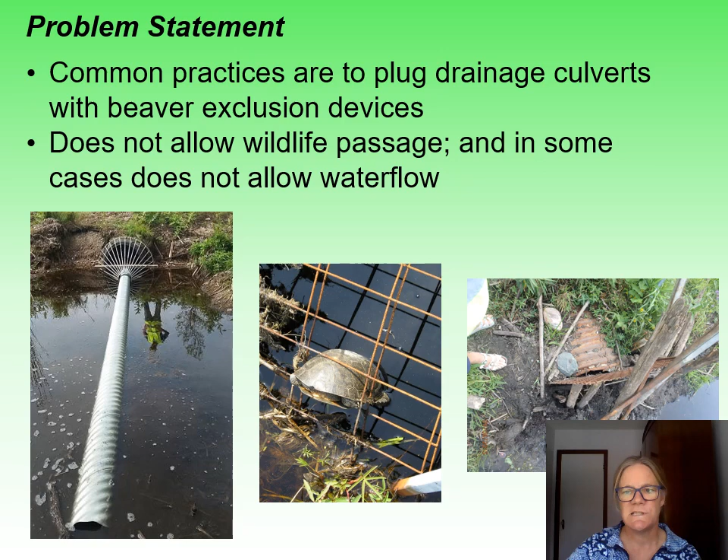So the objectives of this project were to have drainage culverts in beaver and turtle habitat to be able to pass water and wildlife under the road. And also we need to prevent beavers from damming these culverts so they can pass the water and the wildlife.

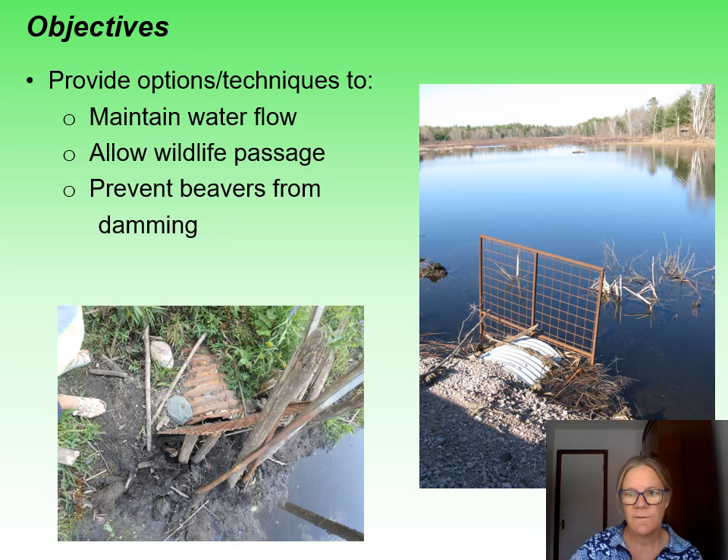So our target species in this project are freshwater turtles. We have 8 species in Ontario, and all of them are listed as species at risk on the Species at Risk Act at the federal level. Road mortality is a serious threat for all of these turtles, and often these turtles come up onto the road shoulders to nest, and they are more at risk of roadkill. In addition, they cross roads to get from wetland habitat on both sides of the road.

So our methods were to first begin with a literature review to evaluate whether there were exclusionary measures used for beavers at drainage culverts, as well as for wildlife passage, and to look over all of these methods that have been used in the past. And we came across experts and contacted them, such as Mike Callahan and Skip Lisle, and we compiled all this information. And we had a MES student from Queen's University do this work.

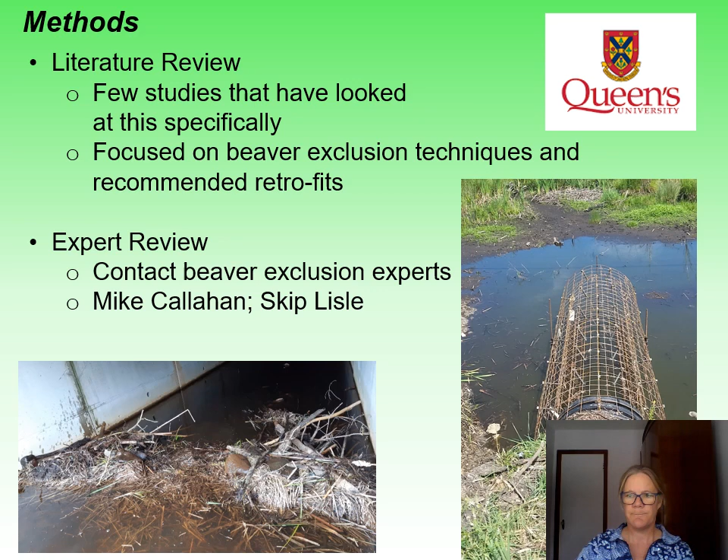So the journey began, and we found Facebook resource topics, and we also found resource books. Eager, for example, written by Ben Goldfarb, who is now writing and researching for a book on road ecology. So we compiled all of this information, and what we did was look and focus on beaver exclusion techniques that are used by experts and how these techniques can be modified for wildlife.

One example is in the top right. We have one-way doors. So in these exclusionary measures, fencing that is used around culvert faces to keep beavers out, we can put one-way doors to allow wildlife, when it comes through, to escape the exclusionary measures.

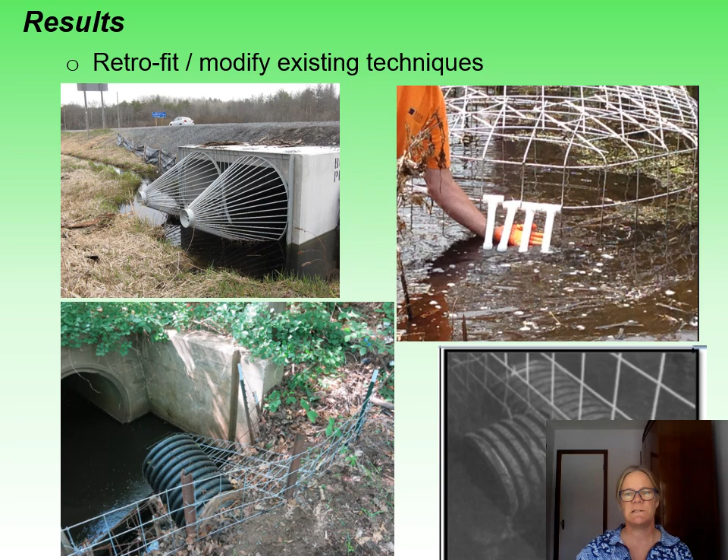Turtle doors. The turtle door concept is when you're putting the exclusionary measure around the culvert face to keep the beavers away, you include a gap, and this gap is upland, it's in higher water, so the beavers will not go around out of the water through the gap with their sticks to plug the culvert. And the idea is that turtles can still fit through this gap to use the drainage culverts.

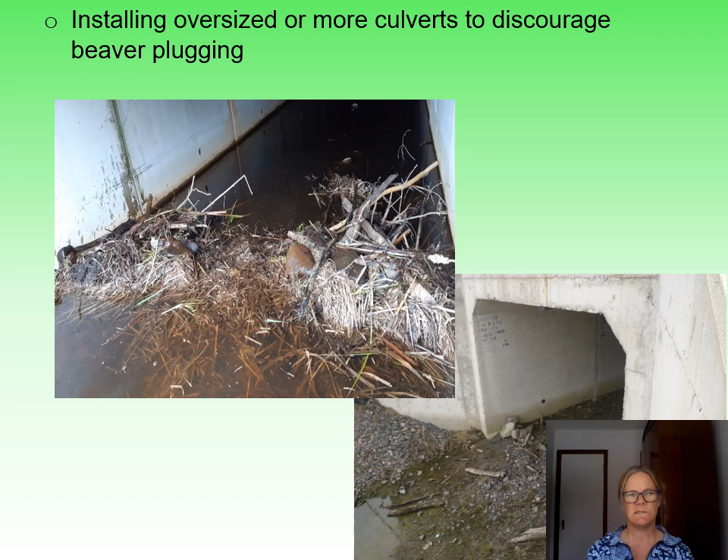Another concept is to be proactive and to have extra large drainage culverts rather than the smaller typical 800 millimeter culverts, which can pass more water. And also beavers will be less inclined to dam these larger structures because of the amount of debris and effort required.

So our study site was on Highway 7, located between Peterborough and Ottawa. And this area had a lot of freshwater turtles, a lot of wetlands. We had been monitoring it since 2012, and we found that this one location had reoccurring hotspots for the 5 years of monitoring, and quantitatively, the roadkill rates were quite high. So we focused on this spot, and this spot was ideal because it was about a 500-meter hotspot segment. And so we could include exclusionary fence along the wetland habitat on both sides.

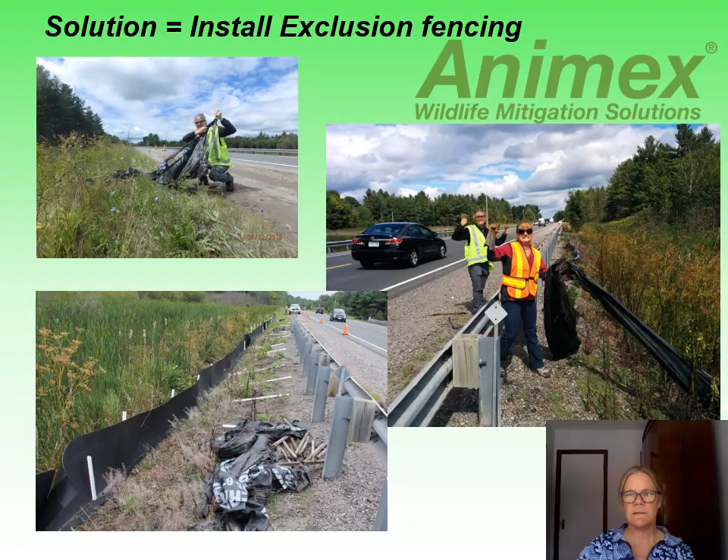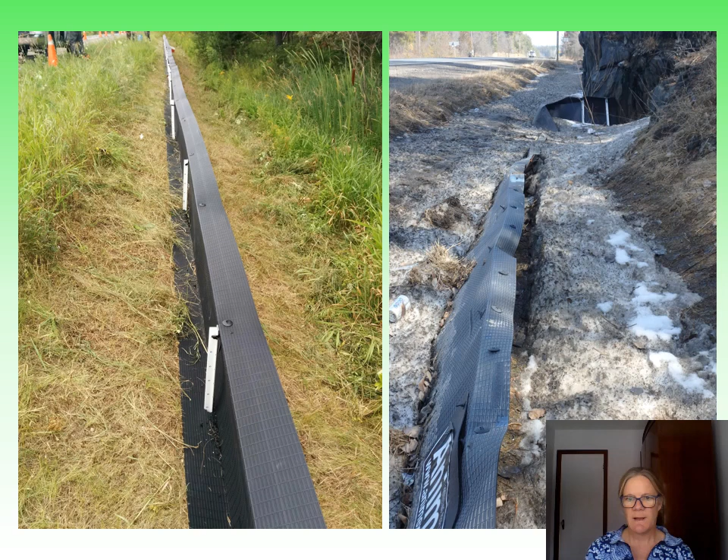So Animex fencing was installed, and this material was donated and very well fit our budget. So we went ahead and installed the exclusionary fence in 2013, and we monitored. Phase 1 entailed putting the fencing on top of the ground surface on the roadbed in the road shoulder, and we used PVC posts to hold it down. But this installation method did not withstand Canadian winters with our snow and ice. So we went and reinstalled this solid material into the roadbed, and we used larger PVC pipes, and we also trenched it in to protect it from the snow and ice.

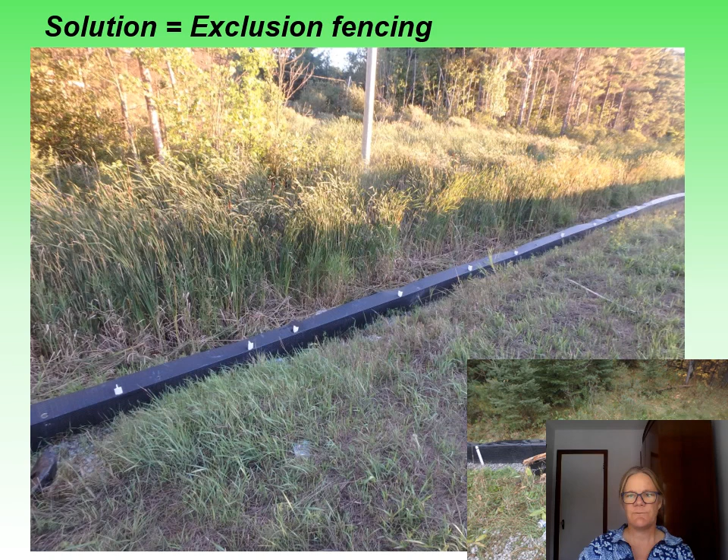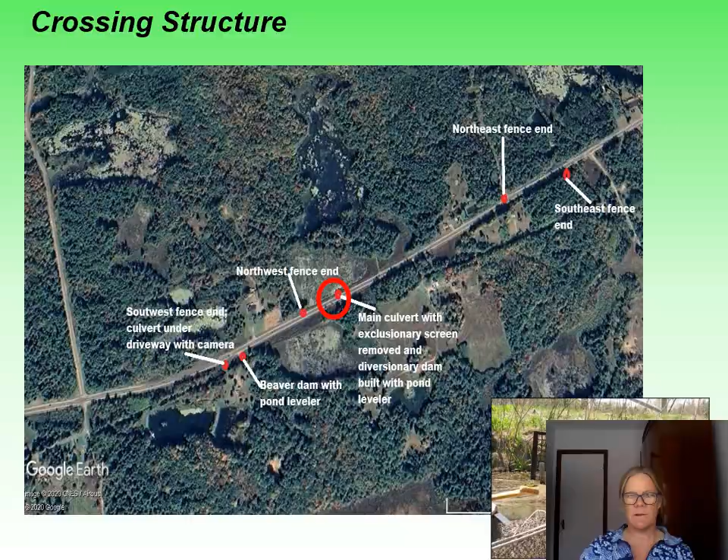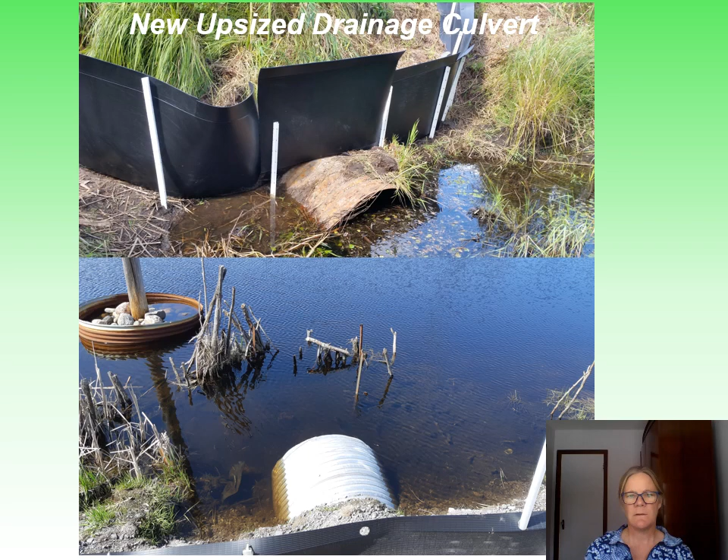So after we installed the exclusionary fence and we showed that it was able to work and reduce roadkill, we wanted to now get turtles past the highway in a safe way. So we went to work at the main drainage culvert, where that red circle is, right in the middle. Luckily, at the same time, the Ministry of Transportation replaced that drainage culvert from an 800 millimeter to a 1200 millimeter culvert, which was more ideal for turtle passage.

So what we did first was we built a diversionary dam. This had been used previously as per our literature review, and it showed that if you put up sticks and started a fence, an exclusionary barrier for beavers, that they would build on this. And then we would hope still that turtles could go around the beaver barrier and use the drainage culverts. So we tested this idea, and we found in the top left picture that beavers did build on this diversionary dam. So that worked. However, there was an issue in that our turtle door was not there.

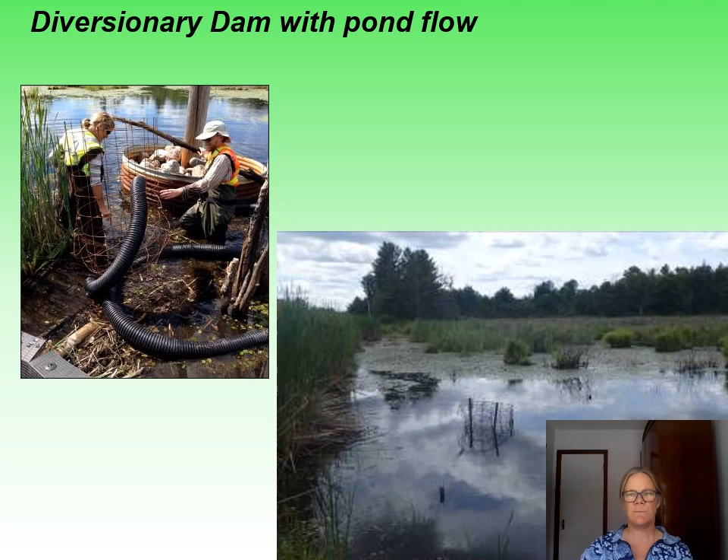Turtles could not get into that drainage culvert because it was now a barrier. We also needed to provide water flow through that diversionary dam. So we built a pond leveler device, which included an exclusionary cage and a pipe that goes into the culvert, and I'll show more of this in future slides.

So all of this put together, now we had water flow, we had a diversionary dam. We ended up moving the exclusion fence back just enough so that we could provide this turtle door and this gap for turtles to access the drainage culvert when moving along the exclusionary fence.

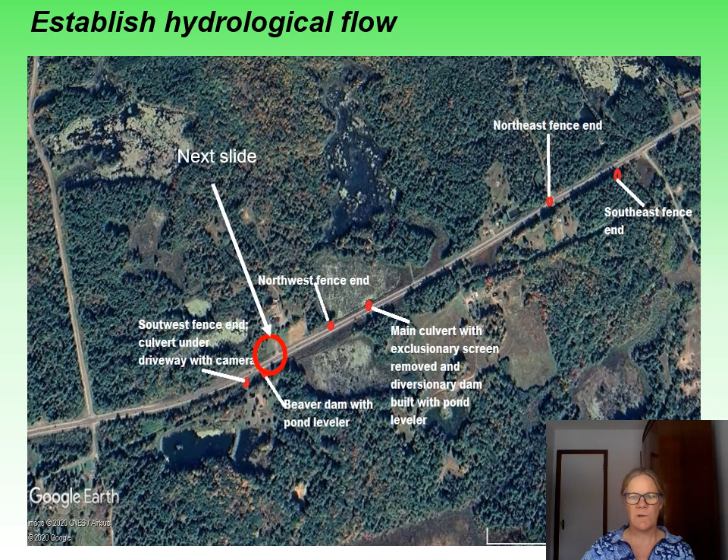So then we still had a problem in that we had a larger beaver dam south and west further down in this system, which meant that even though we had water flow in the main culvert, the water flow stopped at this red circle. So that meant that we needed to do something at that site to maintain water flows to prevent flooding and damage of the roadbed.

There are various methods of doing this, and we selected the method or protocol developed with the beaverinstitute.org. We had Mike Callahan with the Beaver Institute come and look at the site as well and tell us that this was a really good method to install.

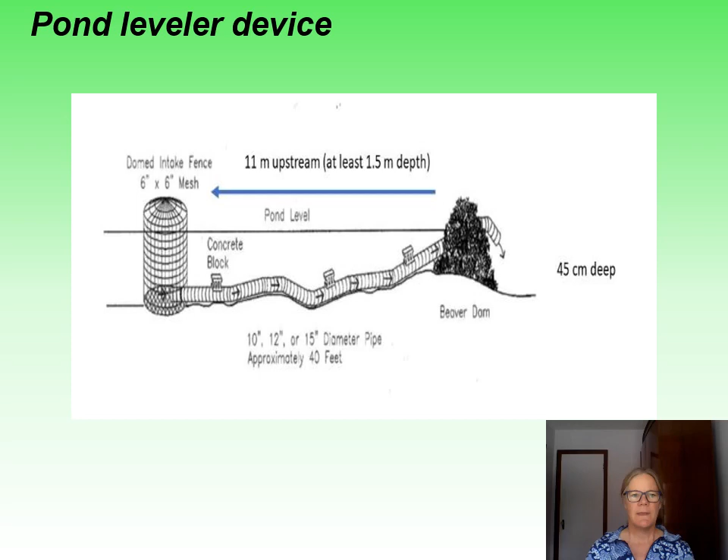So we needed 1.5 meter depth of water upstream, which we had, and that is so that the beavers can't detect the swirling of the water in the inlet side of the pipe. And then the water travels around the pipe and then through the dam and out.

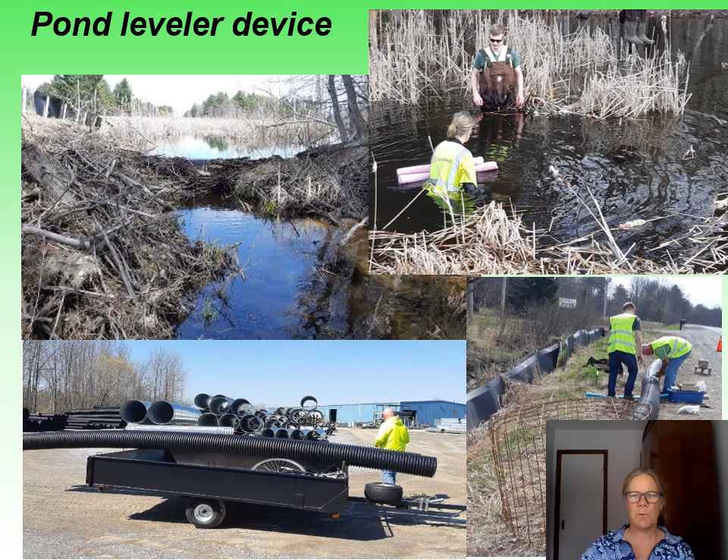So these are some pictures of us installing this pond leveler system and transporting it to the site. And then we have a pond leveler device installed, and it's a success. So you can see the water coming out from the upstream to the downstream side in that black pipe. And what is of note here is that the height of that pipe in that dam will determine how much water you take off upstream.

You only want to take off maximum 1 foot because beavers will not tolerate anything further. This is because they need depth, obviously, to have habitat and to be able to hibernate so it doesn't freeze in the winter. And the turtles also need that for hibernation. They need higher depths so that they're able to hibernate in the same pond.

So we have to maintain 1 foot maximum of water takeoff. So we can adjust that pipe a little bit lower, because we only took off about 6 inches.

So we did monitor the drainage culvert to see if we're meeting our objective of having turtles pass under the highway. So we put a camera up and we had a painted turtle and a snapping turtle use it in July of 2019. We should have monitored earlier, but we were waiting for water levels to decline. We will adjust that pipe and have further water decline in 2020 and further monitor in June when turtles are moving.

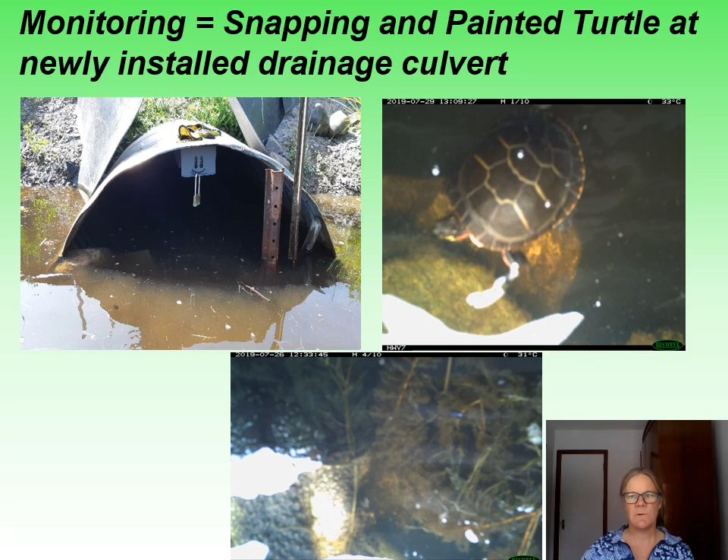Another issue was we had beaver roadkill on the site, two beavers roadkilled in 3 years of monitoring. And we believe this may be because beavers were able to get over the breached exclusionary fence, and then were not able to get back over the exclusionary fence. So we will trial and install some jump outs that will allow them to move from the roadside to the safe side. We cannot have beavers being killed on the site through hunting and trapping and roadkill.

And this is because we need the same resident beavers to live there year to year so that they will tolerate that pipe and the decline in water level from 1/2 foot to 1 foot and continue to survive there and not dam elsewhere on our site, which would just bring us back to square one.

So next steps are to look at other case studies that have installed these types of measures. For example, the Ministry of Transportation in its northeastern region has been installing these types of pond leveler systems in their drainage culverts on their highways where there is beaver activity.

And they have found that this type of installation, versus using beaver exclusion screens and blowing up dams, etc., is less costly. And this is because there is less maintenance. You put these pond leveler pipes in and the whole system looks after itself, and there is no longer maintenance as long as the systems are functioning properly.

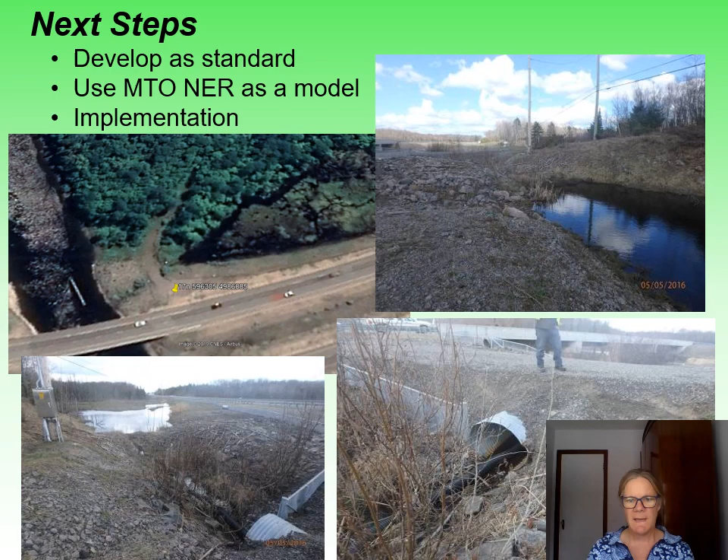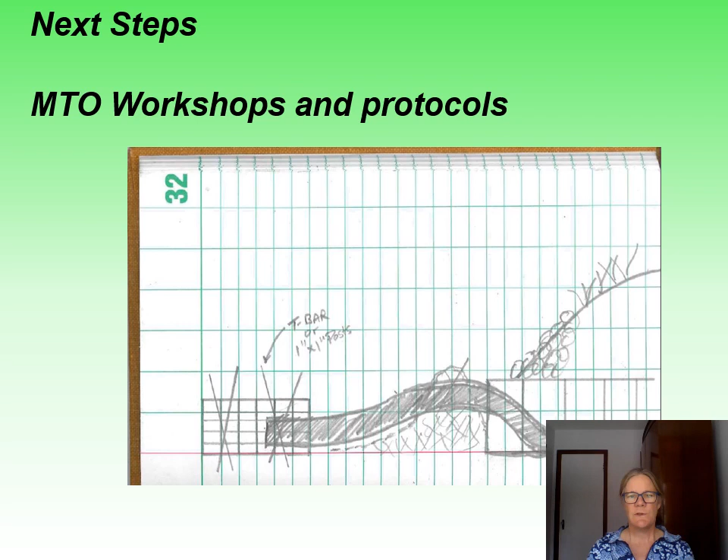So this is just an example of what we could do at workshops and training protocols for folks that are going to implement these types of measures. There are YouTube videos and other materials that we can look at to train people to install these.

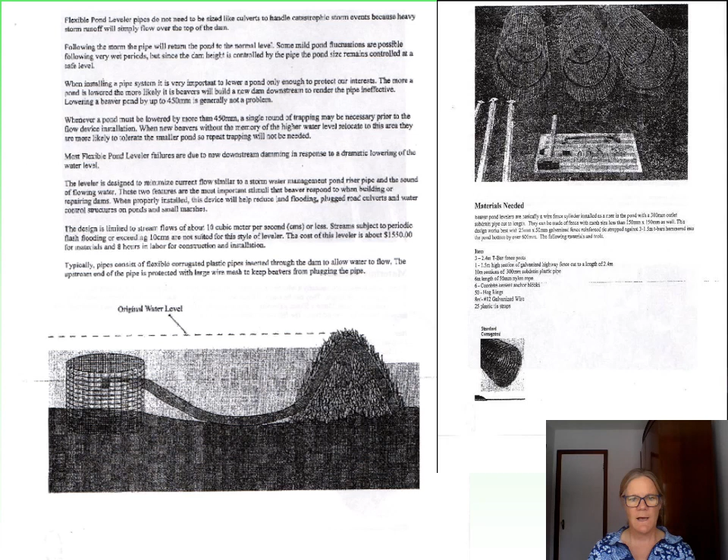And this is an example of a formalized protocol that was developed by Tom Lumley, the retired MTO maintenance superintendent. So he had this for his colleagues to be able to know how to install pond leveler systems.

And I wanted to say a huge thank you to all the individuals and agencies that helped us along the way. Animex Fencing donated the fence material and helped with installation. And then we had Scales Nature Park come out and help us. We had several interns from Queen's University. We had interns from Eco-Kare help us. And of course, we had funding by the Ministry of Transportation Highway Infrastructure Innovation Funding Program.